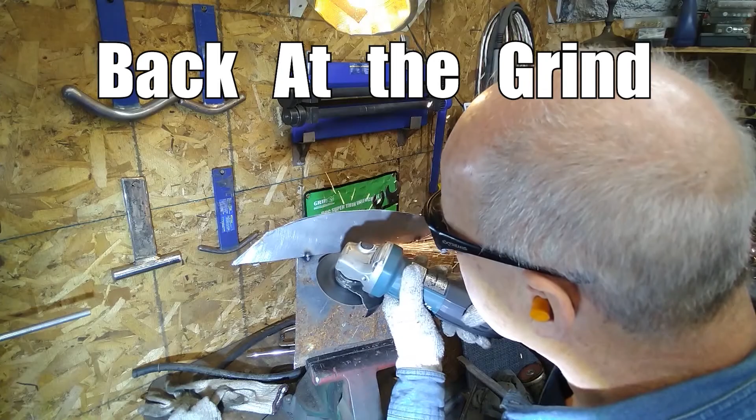Yeah, now, cleaning stuff out, in and out.

So, boats. One boat right over there, moved out. Boat number 2 right here, moved out. It's this one here. I'm gonna slide it into that spot right there where it's kind of sheltered. Then the car, this guy here, gonna go in here, and I've moved those little wheelie things.

Little wheelie things that go underneath there. They make it easy to move cars around inside a garage.

So I'm gonna put the Triumph just in here for now. I'll think about what I want to do later. But for now, I'll just put it in here.

Get the Beamer into the shop, clean the shop up a bit, get the Beamer in there, get it up on the hoist, and get the power steering fixed.

Yeah, so there's a BMW E24 635 CSI back in and going up on the lift.

I got to fix up the... maybe I'll clean the kitty prints off of it, but I'm going to fix up the power steering pump. It's not working just right, and then that should be all right.

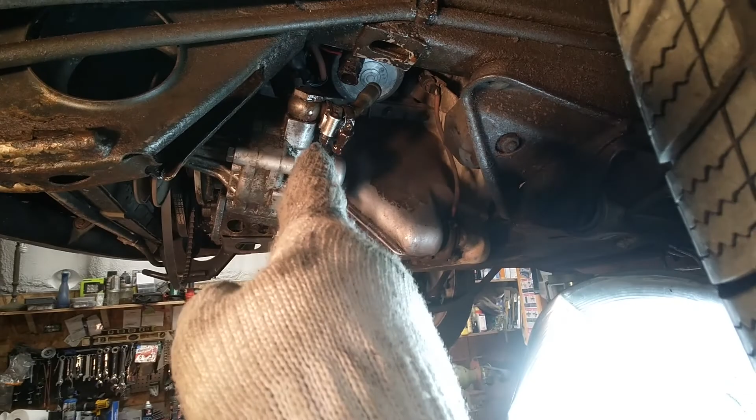Yeah, there it is up on the lift. It all looks mostly pretty good. Now getting this power steering pump out of here, it's not too tough so far.

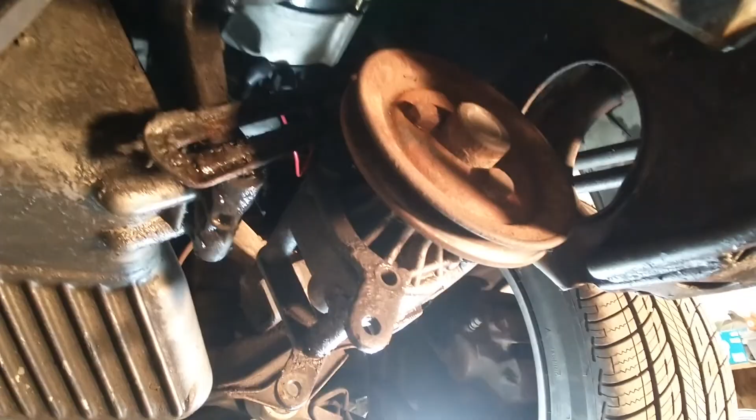What have I got going on here? Get some light up there maybe. Hey, there we go. So this is the pulley, and the belt here just falls off.

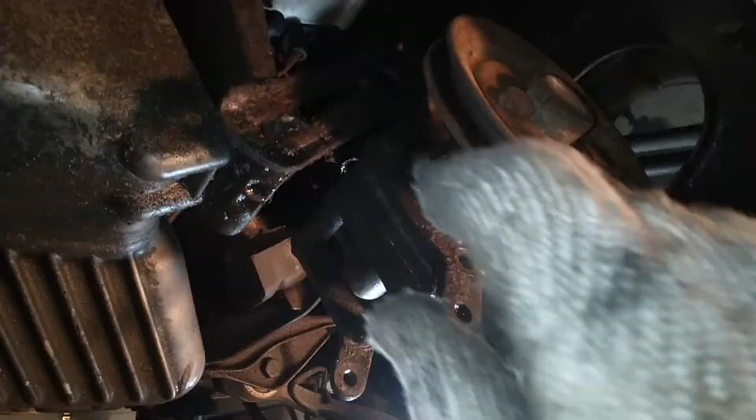Then that thing is all held together by a bracket that goes on here, and then this hooks on up above here, and that's how the tightening happens. There's 2 bolts in there. I pulled them both out just so I'd have some slack. This one here had only 1 bolt because the other one's missing, so I'll have to remedy that somewhere.

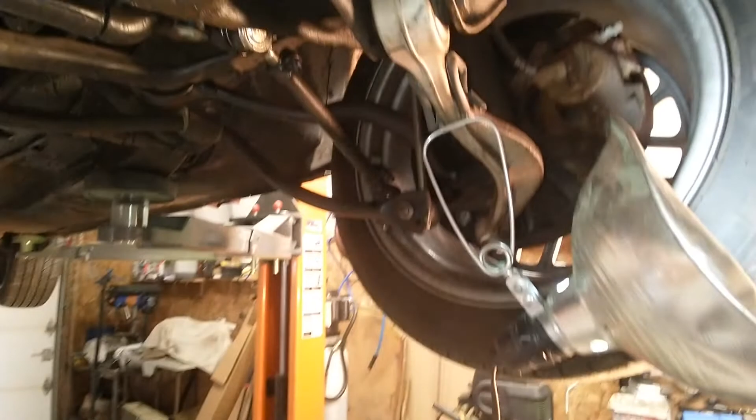Then I did get the hose. I had evacuated most of the fluid from up above there using my evacuation pump, but there's a little bit left. This hose here, I'm going to replace it, but I don't have a piece of hose proper for it. I'll find one somewhere on the planet.

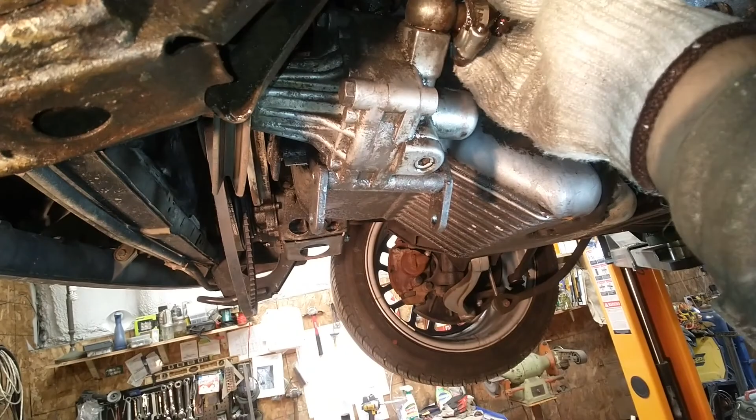And then the main hose, the pressure side, is still hooked on up above here, right on in there, and it takes that size of a nut to turn it off. So I'll just get these things out of the way, number 1. Let that drip for a little while more.

Then I'll pull it off, and then I can put it on the bench and take it apart, because I've got a rebuild kit for it, which is only just 2 washers and an O-ring or something, but we'll see what happens.

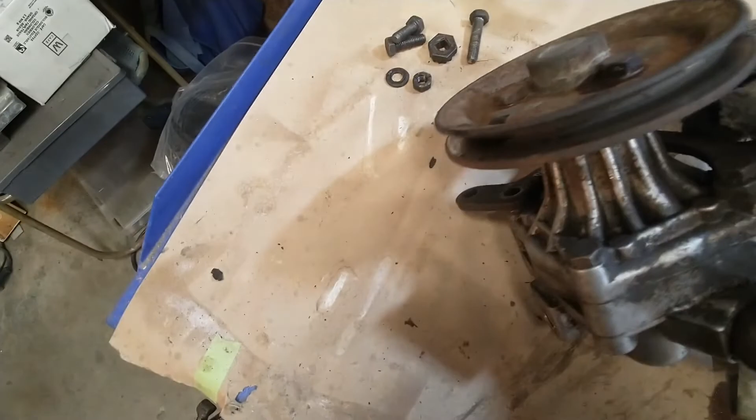Now this banjo fitting right here, it's difficult to get off, but I was able to get some leverage on it. So that's what it looks like.

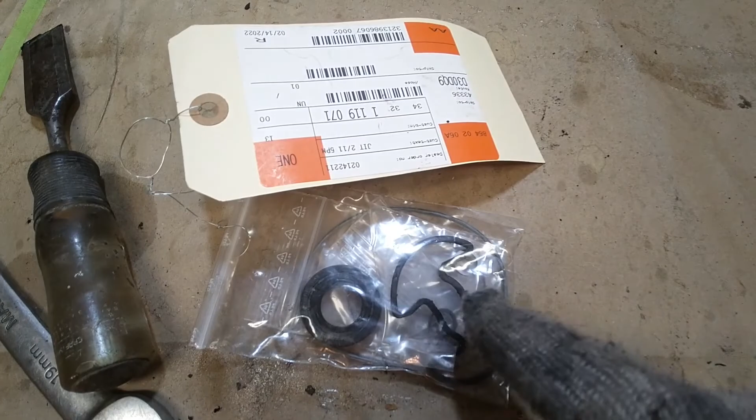Now here's the rebuild kit. Looks like there's an O-ring in there, a couple other little pieces, a couple of whatever it is. Don't know. Well, we'll take a look and see what happens when I take it apart here.

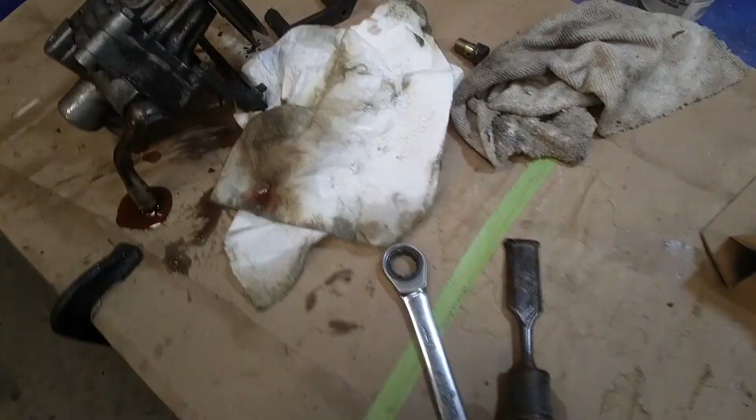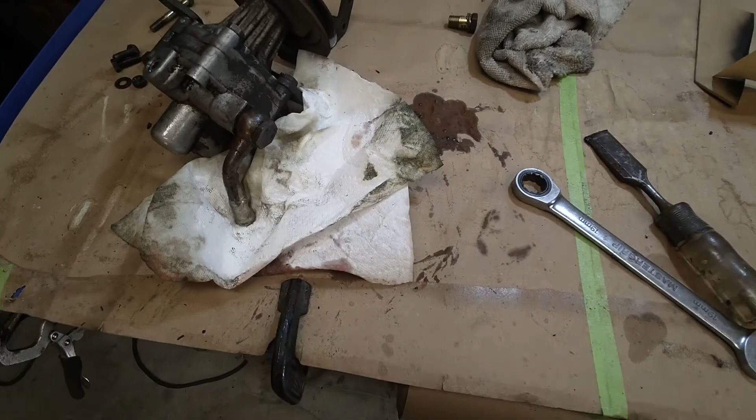Oh, that's just dripping oil out of it, so I might as well capture that. Anyway, these are the bolts that hold it together, and I'm not really sure what comes off of where, but I'll pull this bolt and see what happens. I might have to take this pulley off of here.

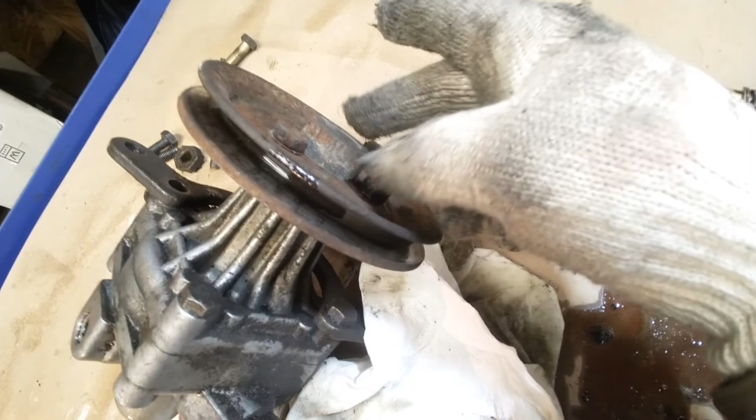Can't really see how that would work, don't know. Find out. But that certainly looks like the right size for that seal there.

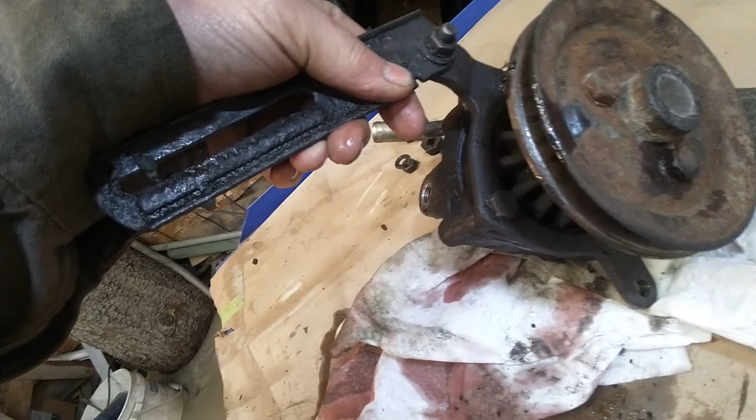So I better take a shot of this before I take it all apart. The bracket goes around 3 corners like that, and it's just below this piece here. So maybe I can remember that.

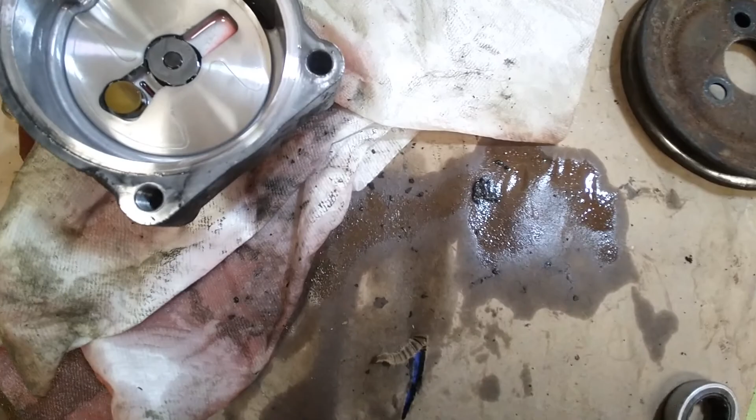Yeah, so I did get the pulley off, and I've got it broken in 2 pieces here, the back part and the front part. Now, figure out how to make this thing, like there's the diagram of it, right?

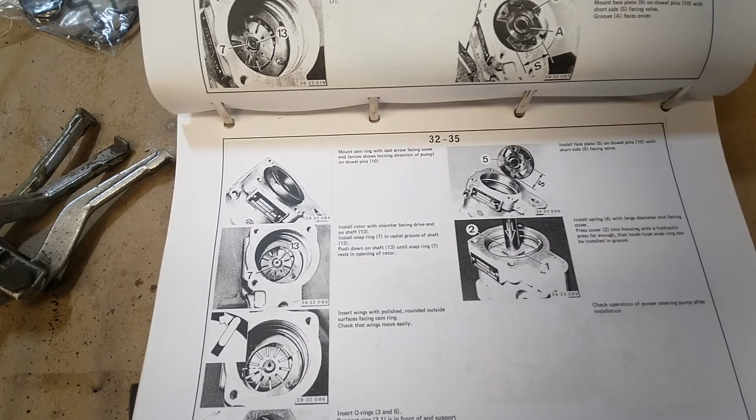Oh, here's actual instructions, hey? So I'll follow the instructions, see if I can make it come apart and get the rebuild kit put in there.

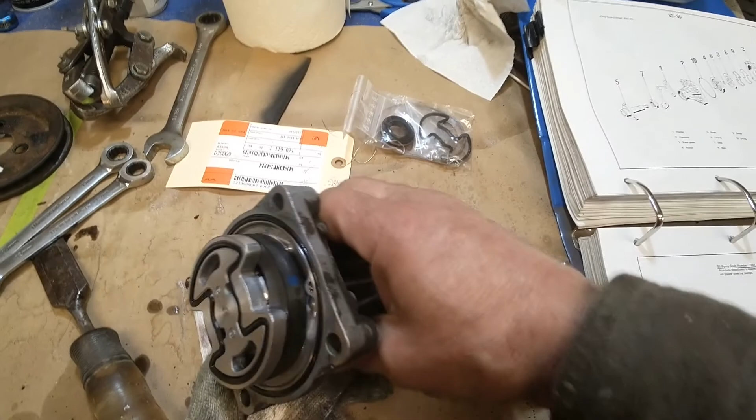Don't you know, I was trying to follow the instructions, but I couldn't see anything that looked like mine. So don't you know, there's 2 different kinds.

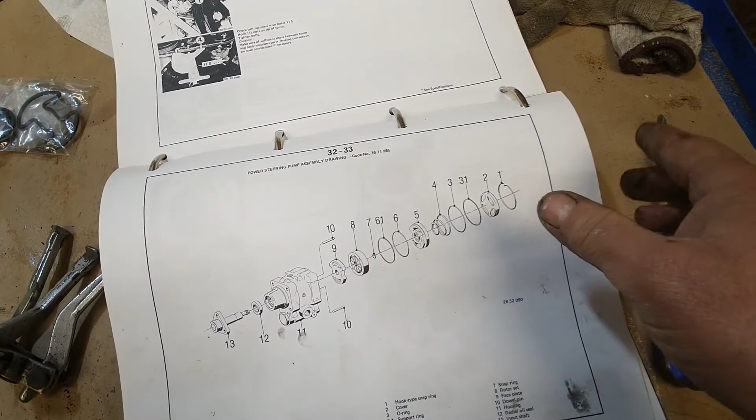This is pump assembly code 7671955, right? And I've got 7681955. So there. That'll make it. This one here looks like mine anyhow, so I'll be able to take it apart.

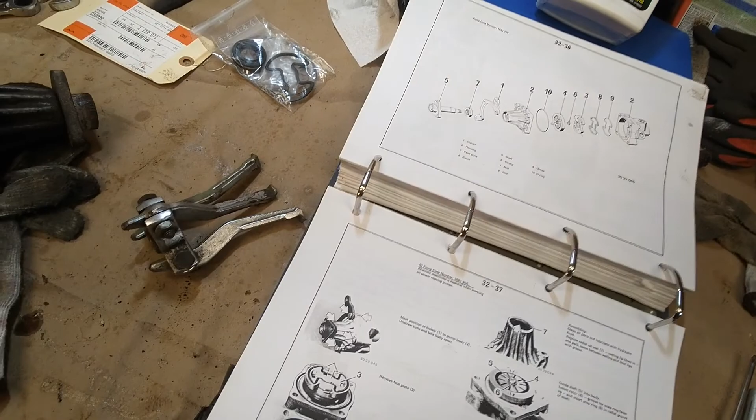I'll follow the instructions a bit anyhow. And the first thing I did wrong was not mark the right position for where things go. So I'll figure it out. I'll look back at my film and see where it's supposed to be.

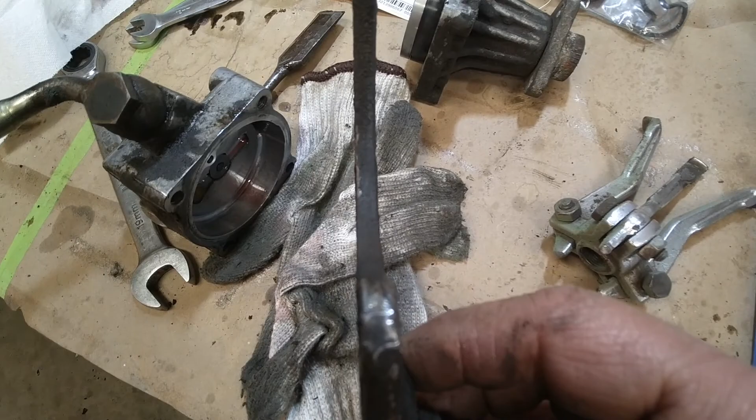Yeah, so now I put a file mark on here, put a file mark on here, and put a file mark on there. Those all go together. Okay. Then it says mark position.

Take it apart, right? Remove the faceplate. Now, how do you remove the faceplate? The faceplate, 3.

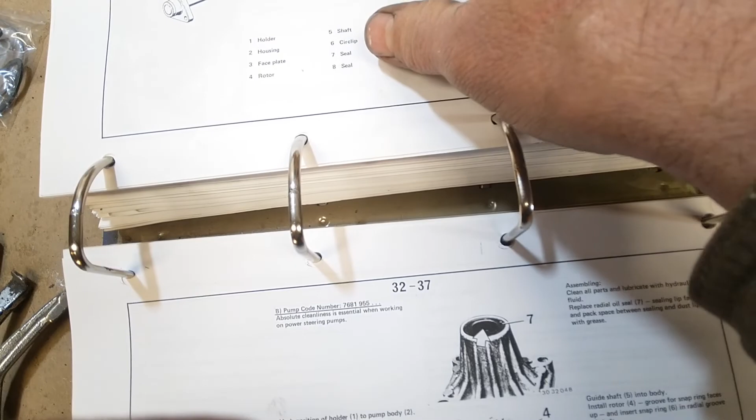Remove the faceplate. Does that just pop off of there? Maybe. I'll just take a try at it. Yeah, so the faceplate just pops off.

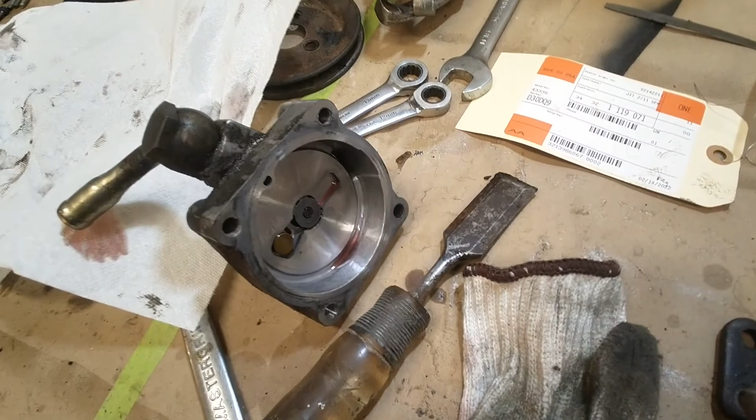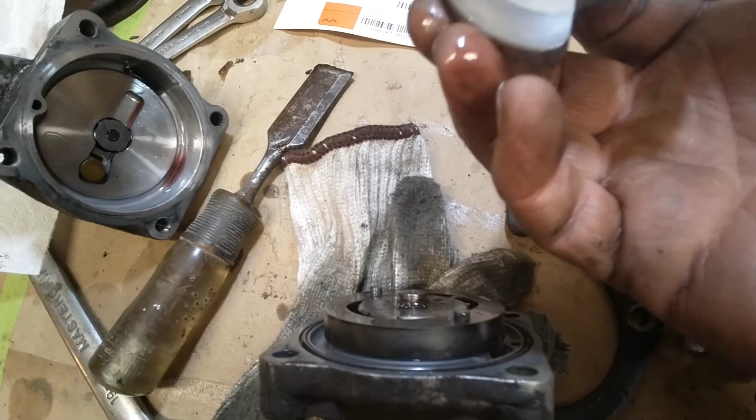And I don't think it matters which way it goes back on. It's got 2 holders, one there and one there. That seems to work that way. One there and one there. Seems to work both ways the same, so I don't think it cares which way it goes. I'll just put that over there.

Remove the faceplate, right? Press rotor number 4 on shaft 5 downward. Rotor number 4.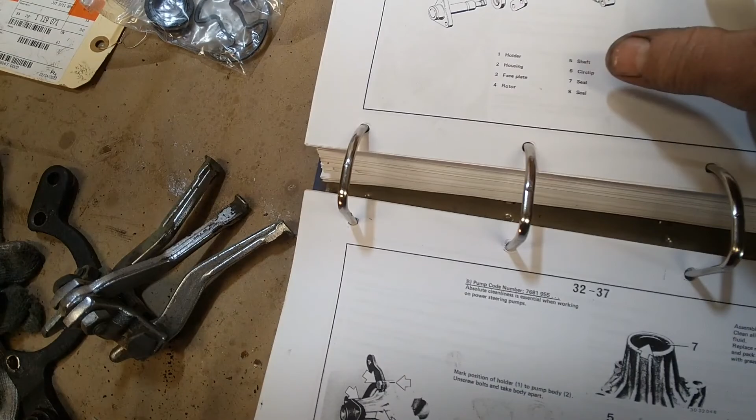Remove circlip 6 and pull shaft out of body. Remove rotor with wings.

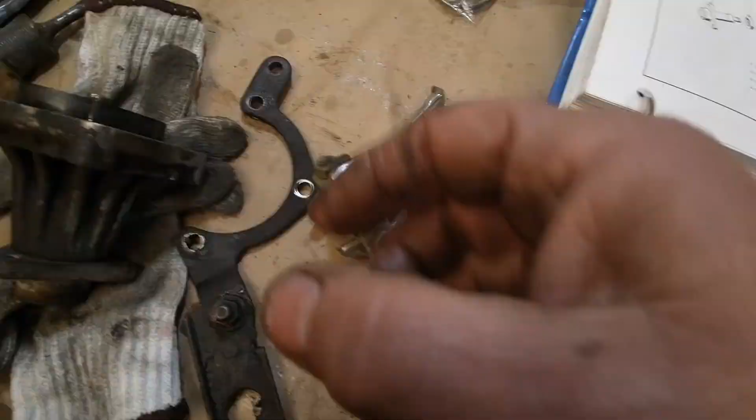Oh, so the rotor you press in, right? I see, you can press in the rotor a little bit, and then you move that, take that circlip out of there somehow or other, which is, you know, very, very simple, except when you have to do it.

Yeah, after lots and lots of work, I got that circlip to come off, but then it took a fly. It went way over there somewhere, I heard it pinging around. So I have to find it because it's an integral part of this whole thing.

But I think that's a tomorrow job because it's supper time. I'll just won't disturb anything over here until I find that little tiny thing. I'll let the car down.

Yeah, tomorrow maybe I'll have better luck finding it. But right now, it's not readily apparent. Oh dear. Oh well, I'll just take a look tomorrow. Well, there now, I got a bit ahead of you on that.

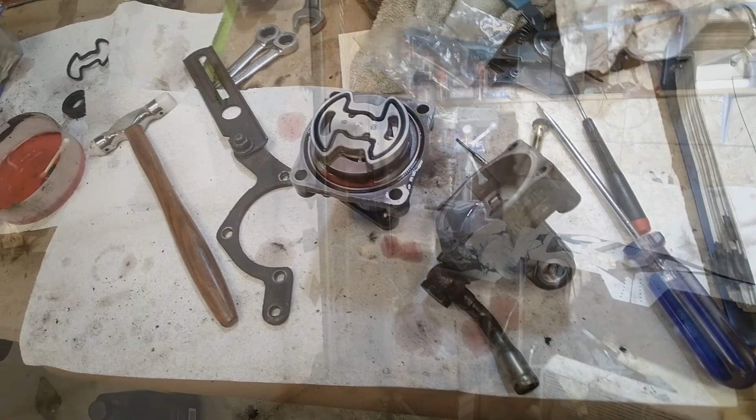So this part here gets a new seal and an outer holder thing on it, a new seal here, and they're nice enough to send you a new snap ring because, don't you know, I lost the old snap ring, it took off. But all there is are these 2 seals, that seal there and that seal, and then the shaft pulls out.

And you put a new seal at the end of the shaft there that looks like that one. That's the old one. This bit here is right there, and an O-ring around the whole thing to seal it, and that's all there is to it.

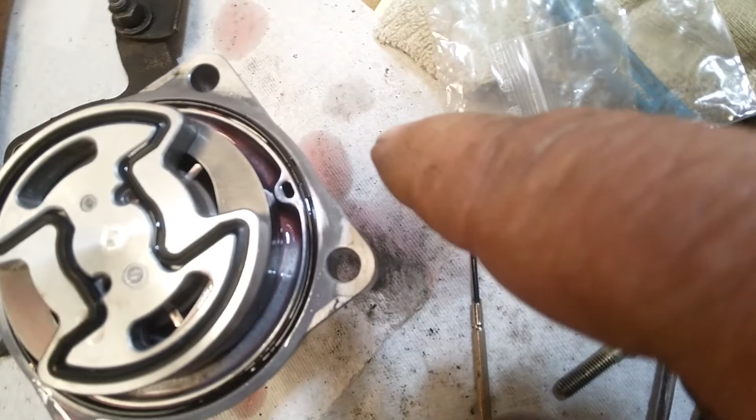Then it just goes back together, making sure that hole right in the middle of the shot there at the left hand side - I'll put my finger on it, right there - and that hole right there line up. Then you got to figure out how to get that bracket back on the right way, which I'll look back at a picture.

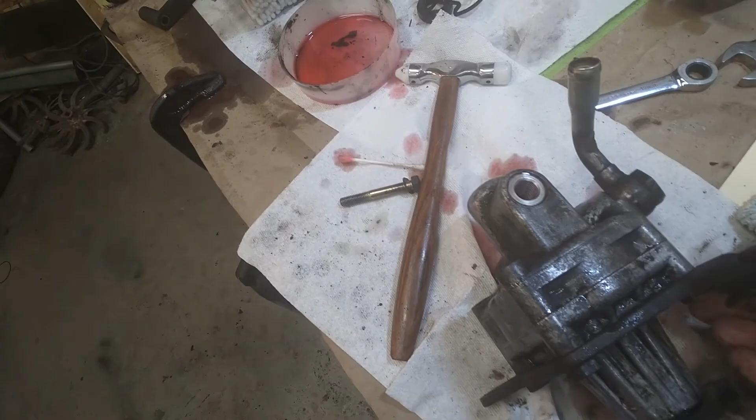Yeah, there, now it's back together, and it turns. I don't know what way it's supposed to turn, maybe that way, I think.

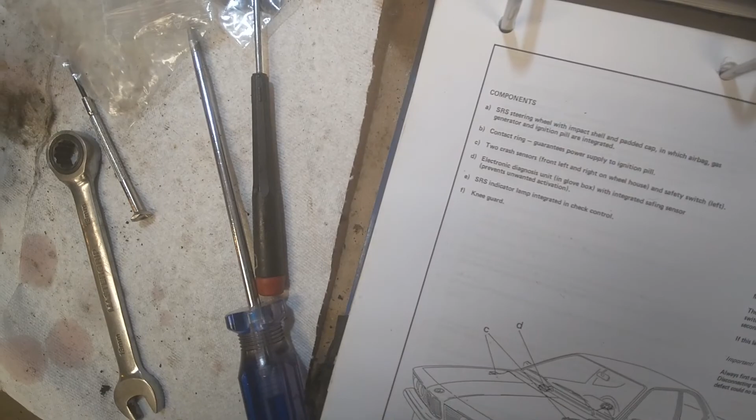And it seems to be all right. So now, next thing is to see if I can get it. Now these have to be tightened up to how many foot-pounds? It says, somewhere over here it says.

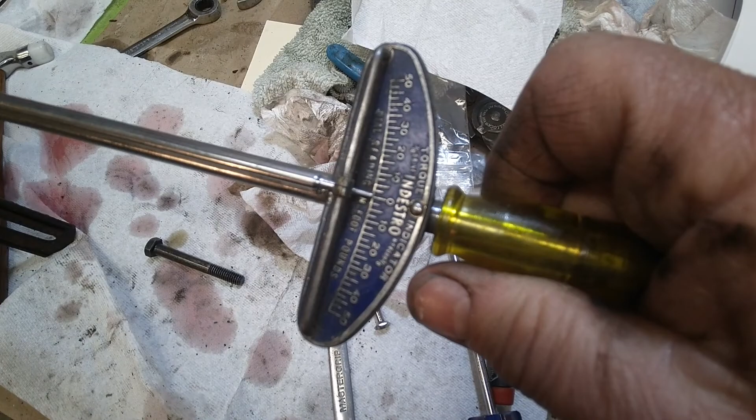Tightening torque, 16 to 19 newton meters, or 12 to 14 foot-pounds. So I'll do that. Yeah, there they are. So they're all torqued down to 12 to 15 foot-pounds, somewhere around there on the little gauge.

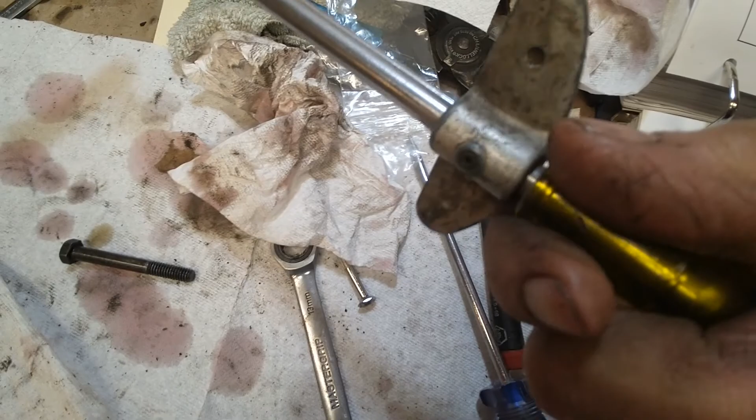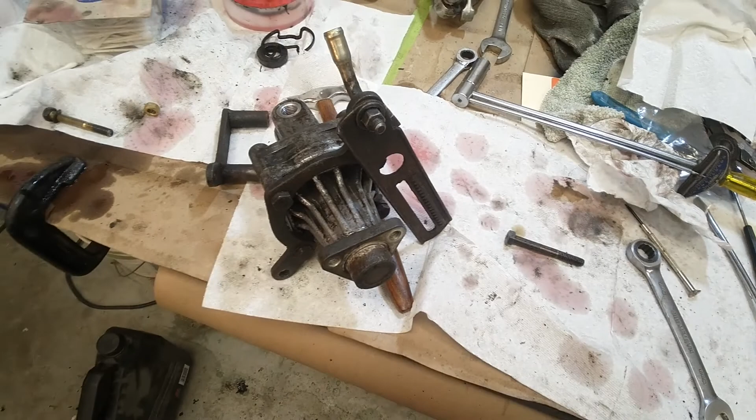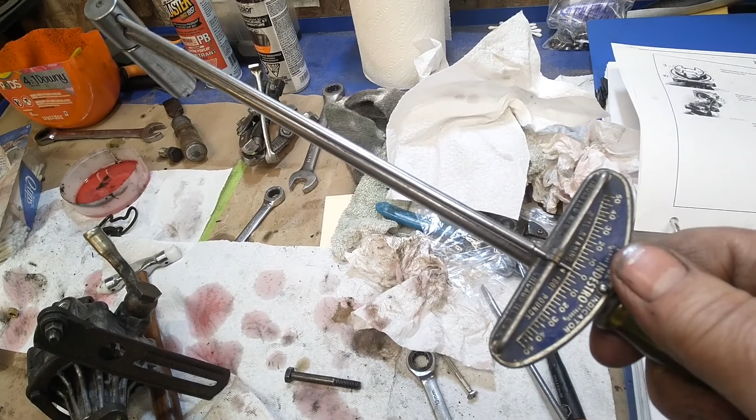Can you see that? That's pretty old style gauge thing. I've had it - it was a gift from Debbie's stepdad, and he gave me a whole set of them. One of them's real big, it'll go up to 300 foot-pounds, and this one here just goes to 50 foot-pounds. I got a medium one there, it goes to 150 or something, and a little tiny one that's in inch pounds. So they come in handy, those things.

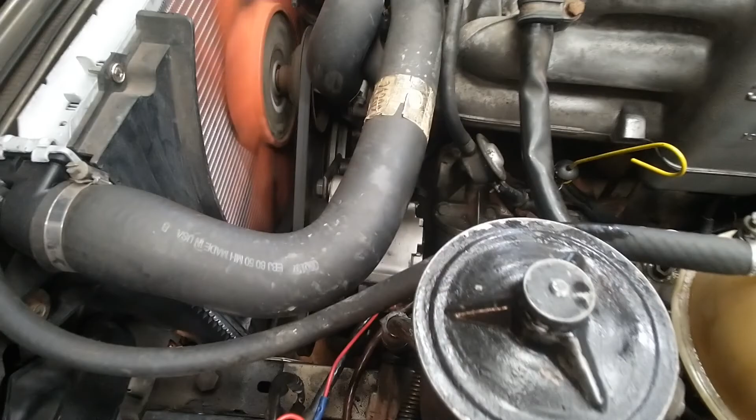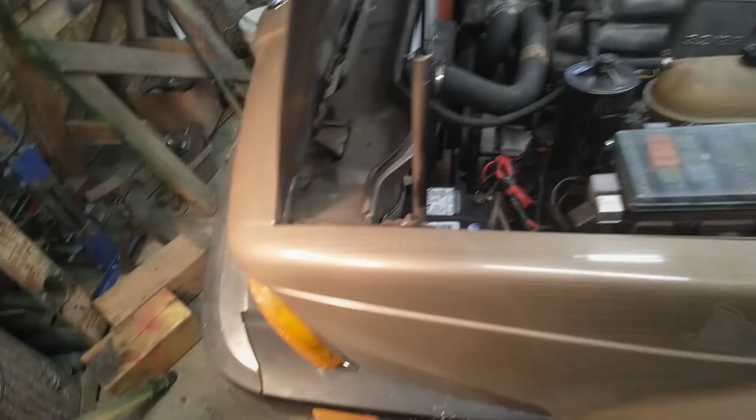Yeah, there it is back together, and seems to be working all right. Seems to be no noise, no dripping. I'll take it for a spin, see how it goes.

Yeah, now here we are moving. Now if I turned the wheels like this before, it was just a howl and a squeal. So I think I might have fixed something up. Power steering's back to being normal power steering. And maybe that brake light will stay off now. It might have been the brake light was a problem because of the power steering not working right - not enough pressure. Anyway, I better get belted up.

See if I can clean off the lens of this thing. That's a bit better now. So now we've got temperature. We've got - can you see anything in there? Yeah, we got temperature, we got fuel, RPM's working. What else is supposed to work? None of the lights are on down there, so that's good. So here I'll just update as we get along the road a bit. Yeah, here we're away, and everything's working good. Speedometer works. Hey, yay!

And pretty big wind today out here. I think I just turned around. I'm gonna go home, clean up myself, and go down and go to the grocery store and get some bananas for tomorrow morning. That's what I need.

Feels good, this car. There we go.